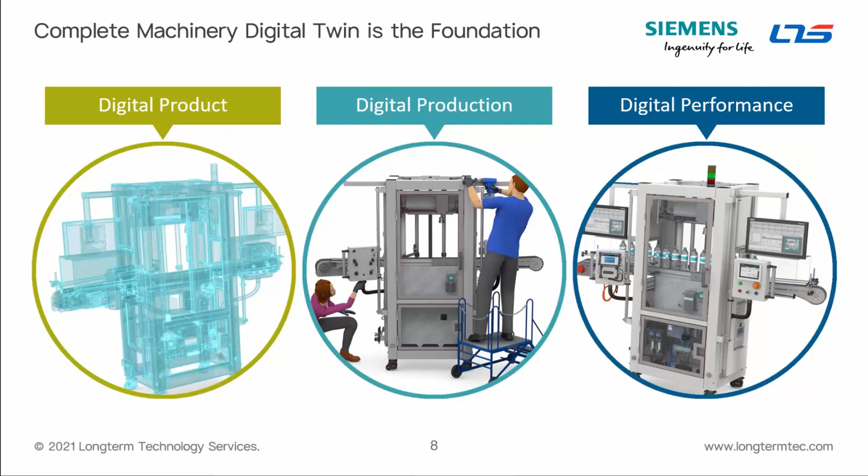With a digital twin, you're really looking at a virtual replica of a product or machine that goes into the realms of electrical engineering, mechatronics, thermal, you name it. It's using physics-based modeling, and it also has the ability to be driven by real PLC code and to validate that code. So this is a really different kind of next-generation simulation that offers you a stand-in for the real-world object, and it can be connected to that object in real time through sensors to measure its performance as well. That has big implications for the way we do things in manufacturing and automation.

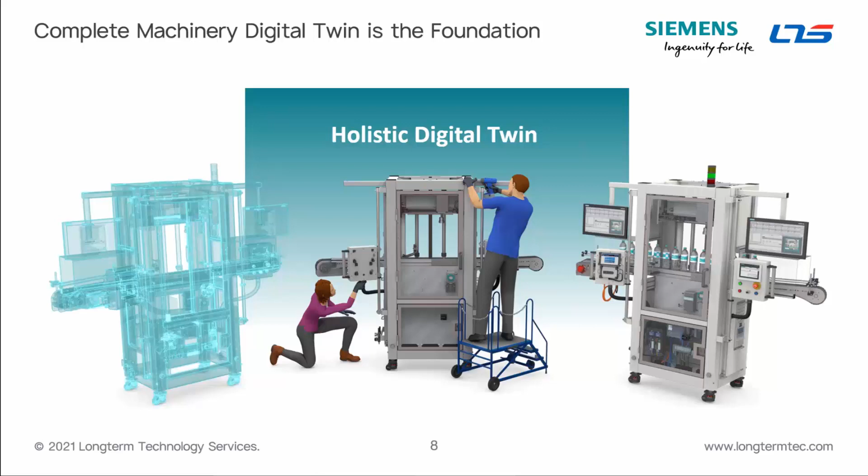It's really this approach that allows you to shift left and bring more of your manufacturing concerns into that design and engineering stage of your product lifecycle. You can do this by performing a lot more work than you could previously in a virtual setting, with the confidence that when it comes time to manufacture or commission a product, you can do that error-free.

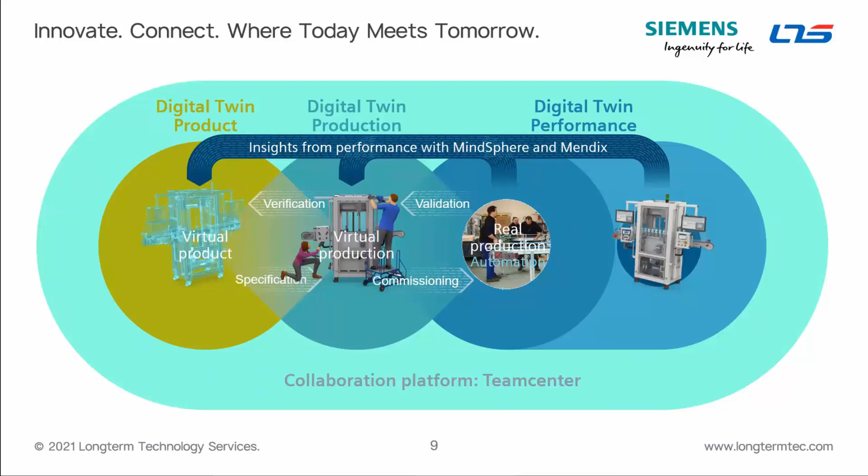So basically, you're no longer stuck creating expensive real-world prototypes only to find out that they don't work. And you're not commissioning real-world production lines only to find out that you're going to get those collisions and interferences that you have to address after the fact, usually at high cost and big loss on your lead time. So that can all now be done in a virtual setting for a lot less cost and much less time, with greater accuracy and efficiency.

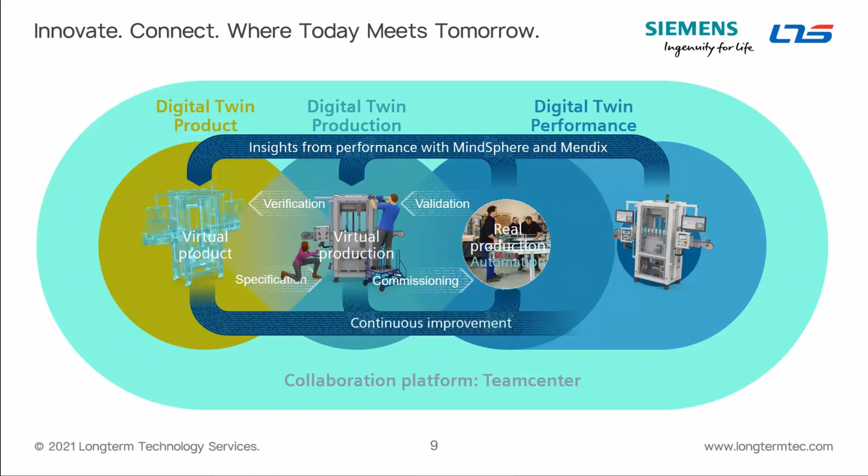So once you've decided to work with a digital twin, it's then really a question of scope. What is the scope of the digital twin product you're looking at? This runs all the way from plant-level simulation down to the level of the individual machine, the PLC that is driving that machine, the hardware that you want to hook up to that virtual commissioning project, that digital twin. But for this webinar, we're going to focus on that top level, which is really the plant simulation level, and all of the associated opportunities with that.

In the other webinars, as part of this 5-part webinar series, we'll focus on some of those other levels. So for example, in tomorrow's webinar, we're going to be moving more toward the robotic station or the line, as we move down that funnel, as you can see.

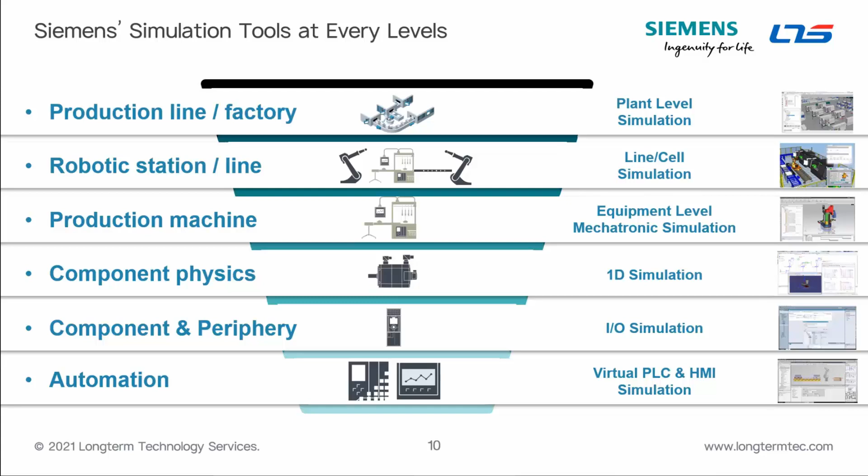So our customers in all industries, from bottle filling to the shipbuilding industry, are using plant optimization solutions. Siemens itself is using plant optimization solutions for turbine building, power transmission, industrial PCs, and healthcare sectors. Some of the key benefits realized by our customers include substantial increase in throughput, reduction in logistic cost, and significant reduction in cycle times.

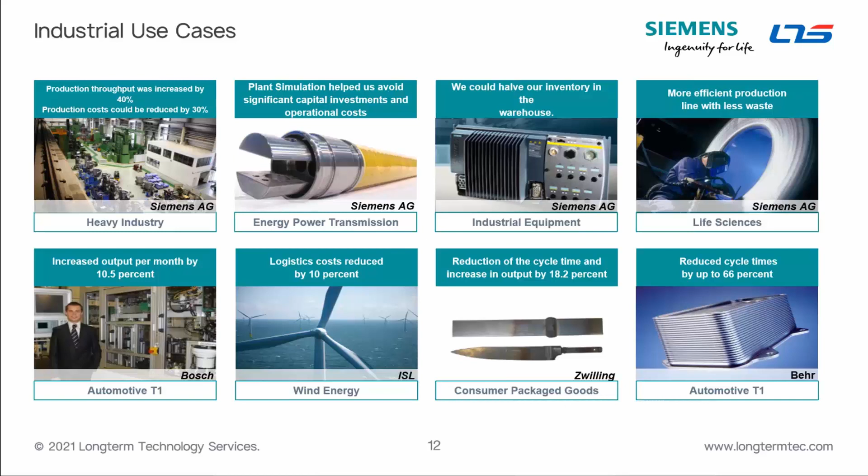Our discrete event simulation is a powerful simulation tool where you can build an accurate digital twin of your manufacturing as well as logistic facility. It could be for a greenfield facility or for an existing system, so-called brownfield facility.

Flexibility: using the digital twin, you can check the flexibility of your production system to meet future needs. An example could be checking the feasibility study for a new product introduction in your line.

Throughput: increase throughput by eliminating bottlenecks and by reducing throughput time.

Next, we might be interested in knowing or right-sizing the resources that we have on the shop floor. For example, it could be a conveyor system, robots, or multiple machines. If you go with a smaller number, you may not be able to achieve the required throughput. On the other hand, if you're over-generous, you'll end up spending excess capital.

You're also interested in reducing the footprint. How can we do that? By optimizing the layout, you can now reduce the footprint.

Work in process: now you might have lots of work in progress between the stations, or raw material stored somewhere. You want to optimize it, minimize it actually, meanwhile not affecting the actual production process.

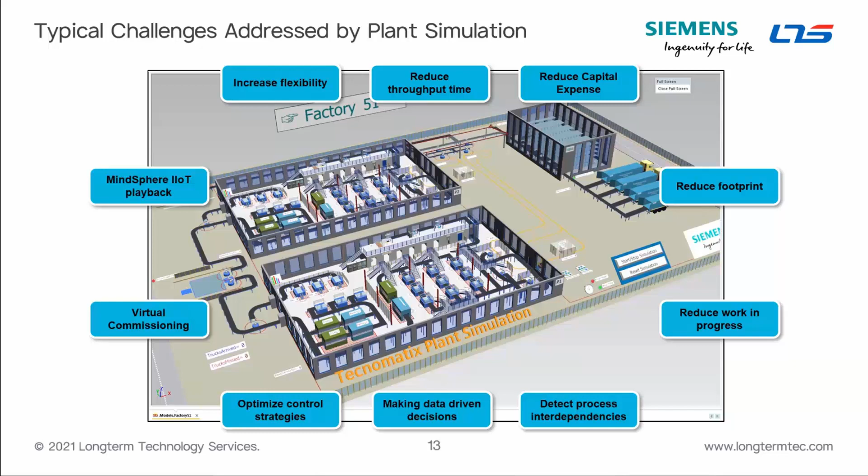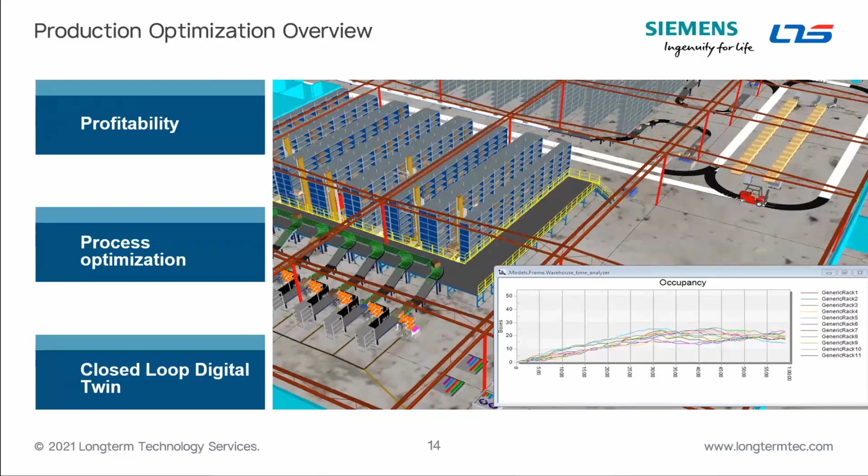So with this, I'll be covering three key aspects of plant optimization solution which can bring significant benefit to users. We will see how you can be profitable by right-sizing resources, by optimizing the process, and by leveraging the power of closed-loop digital twin.

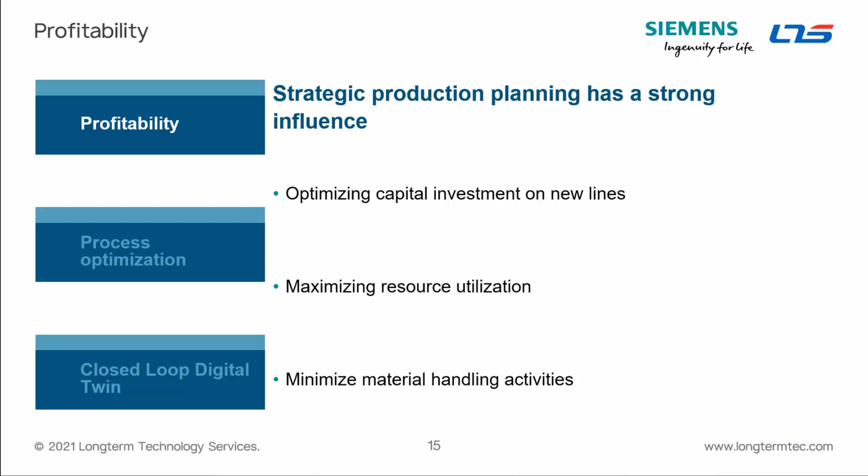Profitability. We want to be profitable. To be profitable, we have to minimize our capital and operating expenditure. It could be for a production line or a logistic facility. Without jeopardizing required output is a key factor here. This can be achieved by effective utilization of existing resources and minimizing non-value added activities.

In this example, you're going to see how you can increase the utilization of existing resources, how you can get higher return on capital employed, and select the best strategy for your production line.

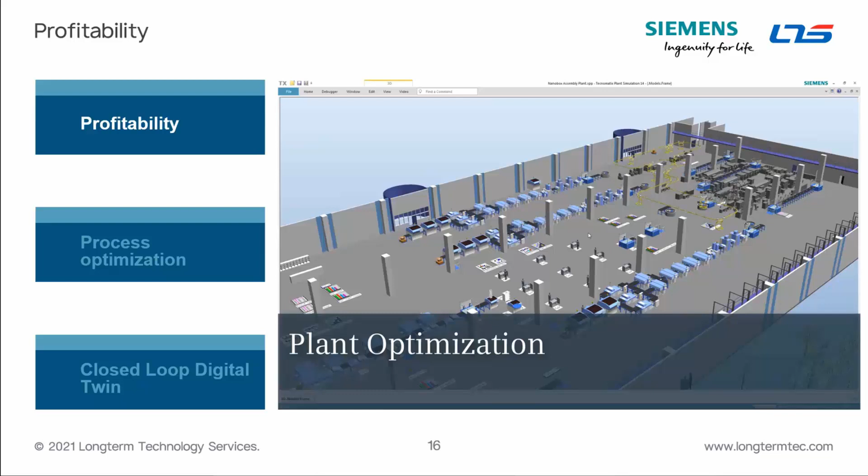Let's begin. This is our production digital twin of the plant, which we keep up to date. This is our kitting area. Kits have become very complex, leading to much rework, and as a result, lowering key performance indicators like utilization and return on capital employed.

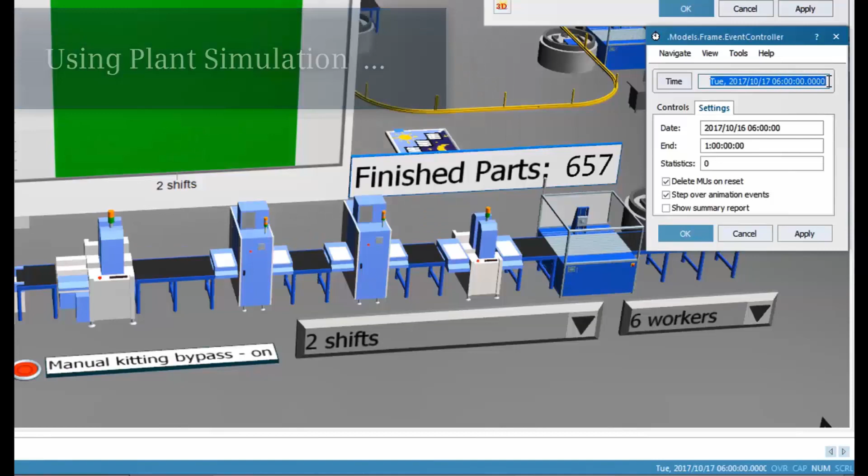We will see three different use cases. First, we will see a use case where we add 2 additional workers to the existing shift, and check the effect on adding 2 more workers. The current baseline utilization is 70% and return on capital employed is 3%.

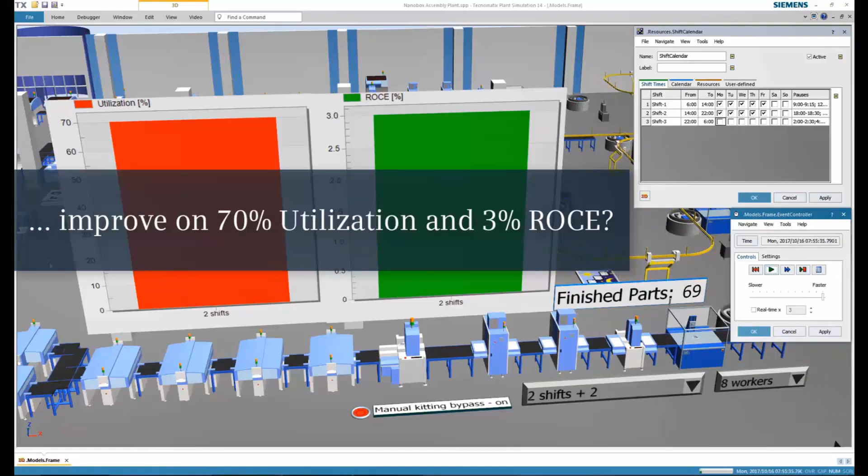Now we can fast forward the simulation to save us some time. This is the advantage of using the solution. We can see the return on capital employed has doubled and utilization has gone up.

Now, how about considering a second strategy? In this strategy, let's take three shifts and check whether our utilization will go up or the return on capital investment has gone up.

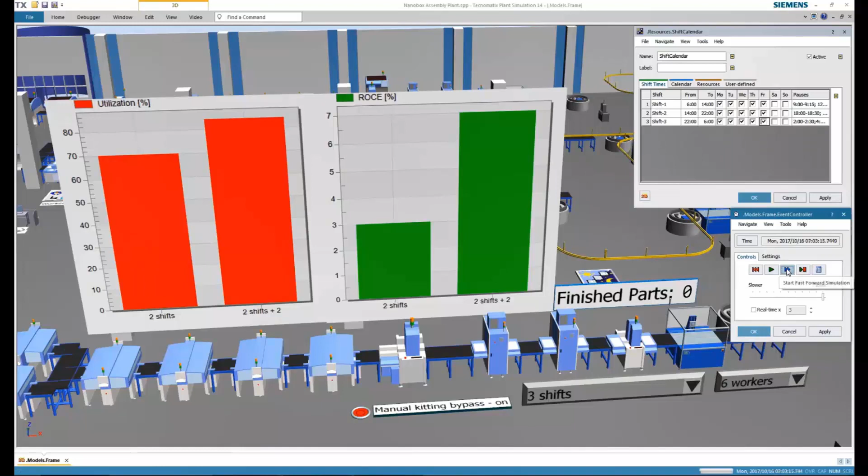Once we run the simulation, we can fast forward. In this case, we are running more parts. However, utilization has not gone up. In fact, it's lower, even the return on capital investment.

At this point, we can completely rethink our strategy. This is the third point: how about bypassing the manual kitting and making it automated kitting?

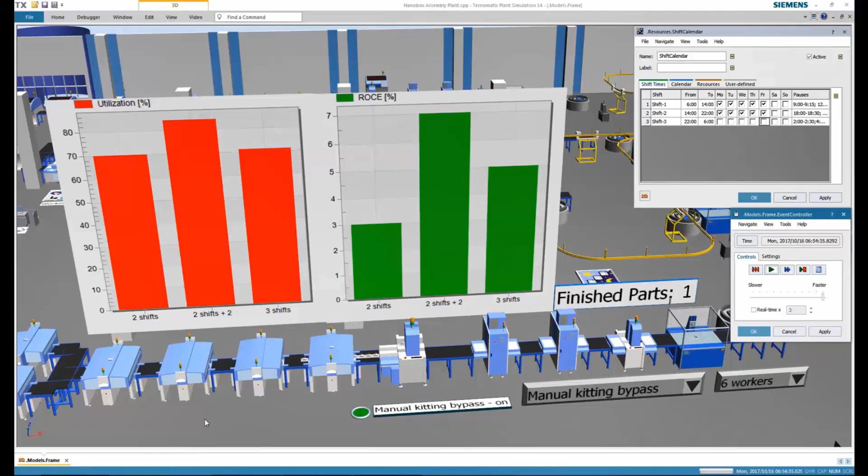The simulation shows there are no parts running through the manual kitting operations. We simulate zero kitting rework, bypassing the manual station. This allows us to assess the potential for automatic kitting.

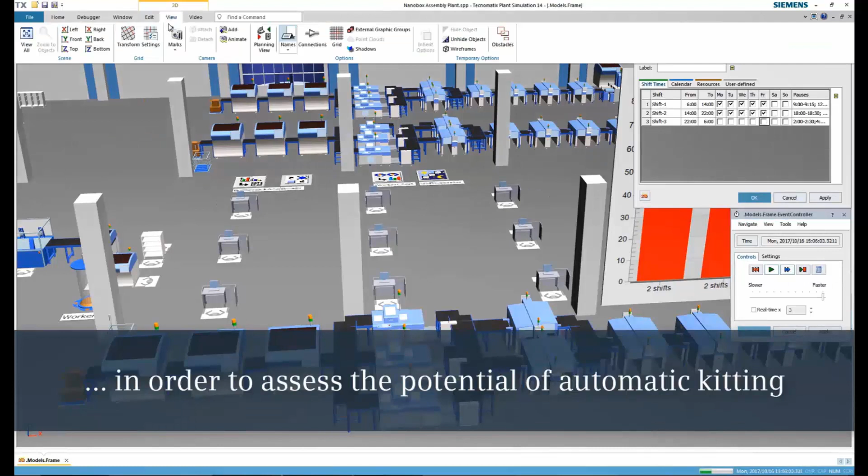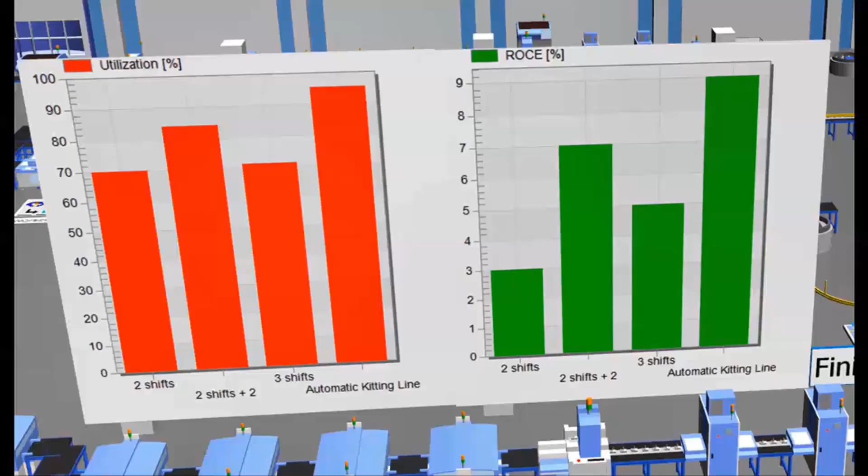After simulation, the digital twin clearly shows the preferred solution, that is automatic kitting, as you can see at the end. The return on capital employed has increased threefold in the automation case and in the 2-shift production process.

By using our solution, you can gain confidence in your investment, lowering operating costs. To summarize how we can be profitable, the simulation tools we are using allow us to evaluate different strategies in the digital twin itself, and we can further fine-tune the selected strategy. This translates to saving considerable financial resources as well as time.

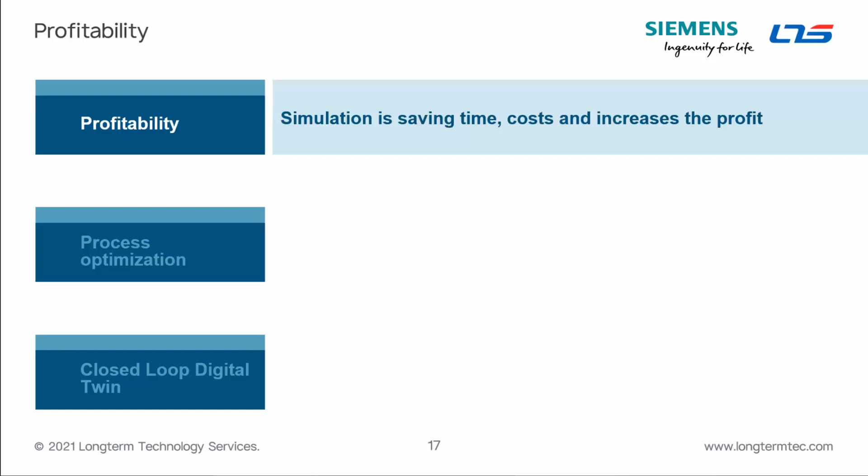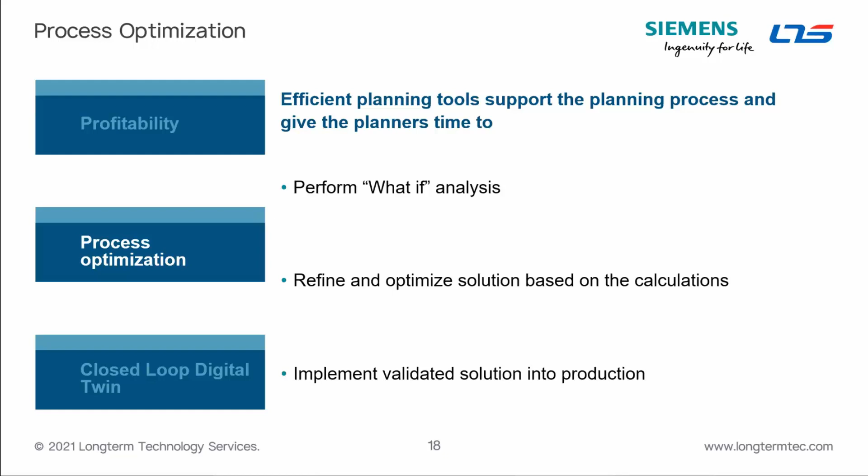Process optimization. Using our solution, you can test different production scenarios, select the best scenario suitable for your production process, and finally implement the optimized solution in your production or logistic facility.

In this example, we are going to see how to detect underutilized resources first, and second, how to optimize a resource that we have selected to get higher throughput. This is our electronic assembly line.

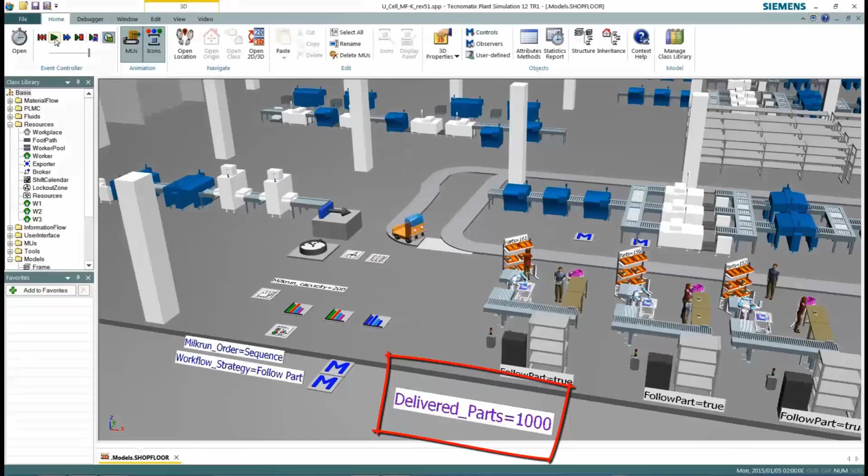Running various scenarios in digital twin allows us to arrive at the strategy that increases the output by 80%. As we can see, from baseline 1000 parts, the throughput has gone to 1794.

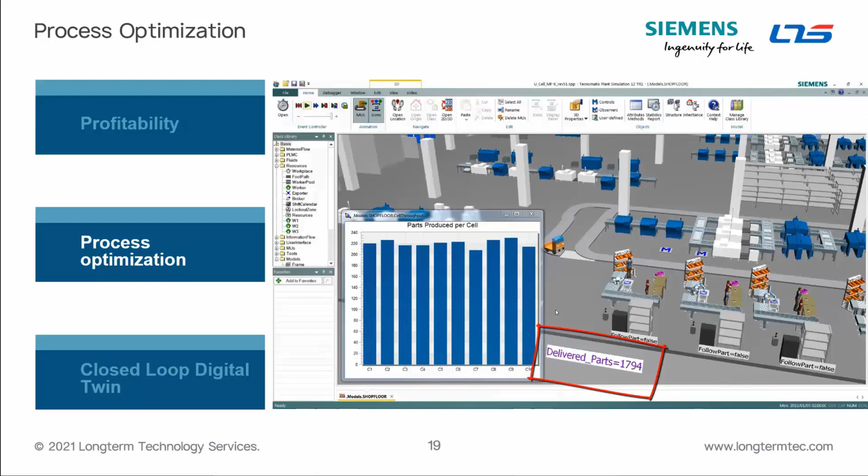This is a usual case where customers have realized lots of benefit out of our solution.

To summarize, by using our solution, you can optimize the production process. This optimized solution results in effective utilization of existing resources and substantial reduction in terms of inventory.

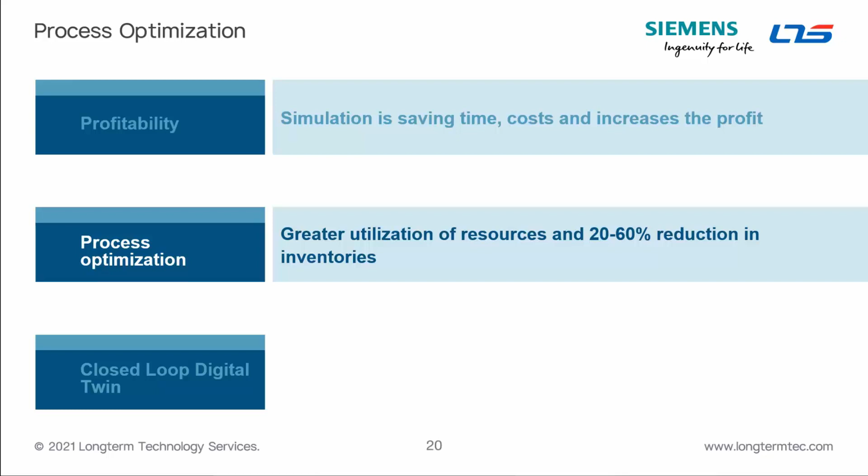Finally, we'll see once your plant is operational and your equipment is up and running, how you can leverage this digital twin simulation. We can take data from the actual shop floor and put that data back into the digital twin to see how production is performing, detect issues or errors, and take corrective measures in the digital twin itself.

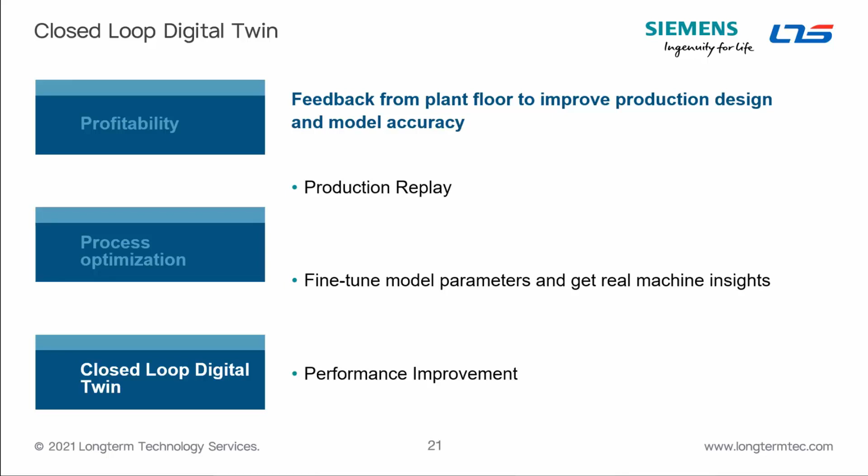Once we have come up with an optimized strategy, that solution or strategy can be implemented in the real production floor.

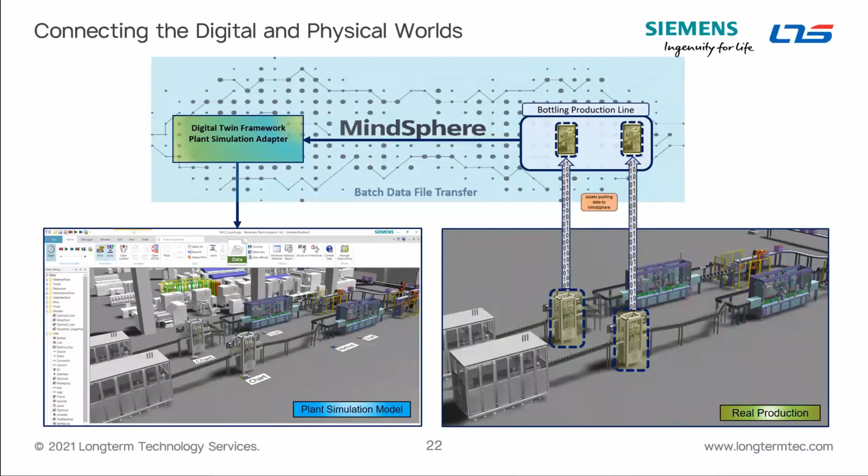In the next example, we are going to see exactly how you can take IoT data from the shop floor and feed it back into a digital twin to detect issues in the actual shop floor and come up with a solution that is best suited. Let me go ahead and play this video.

We launched the closed loop discrete event application from MindSphere, our IoT platform. Yesterday, we saw a drop in production of around 100 cans. We also noticed suspect behavior of a conveyor. We will use conveyor production data, IoT data collected yesterday by MindSphere, to create a study for that conveyor.

Ingesting production data by a digital twin will transform it into a closed loop digital twin. We will want to review what happened, but more importantly, fine-tune the system to compensate for the loss of production until the conveyor is fixed.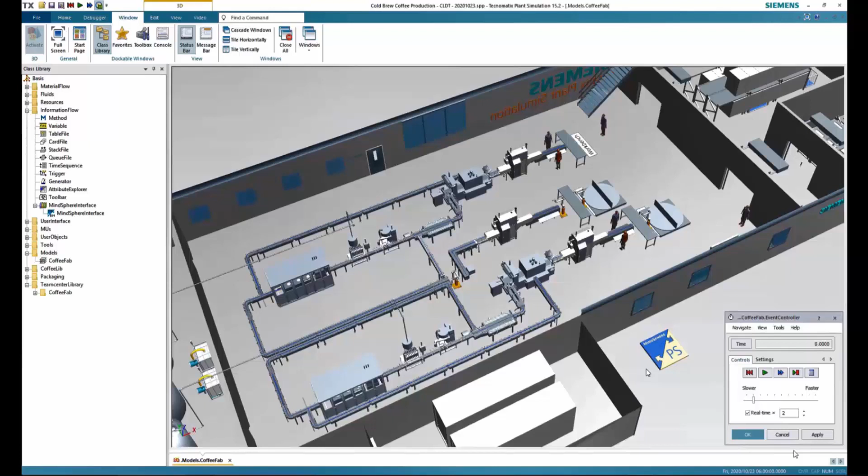The conveyor might have triggered interdependencies beyond the packaging department, so we use the digital twin of our complete production. We add a MindSphere interface to our digital twin, load the study, and apply it to the model. Here is some of the IoT data that is ingested.

Now let's run the study. The closed loop digital twin uses IoT on the conveyor to simulate its behavior. A closer look here confirms our suspicion that the conveyor is failing, and we can clearly see the impact on production. The production rate is going down.

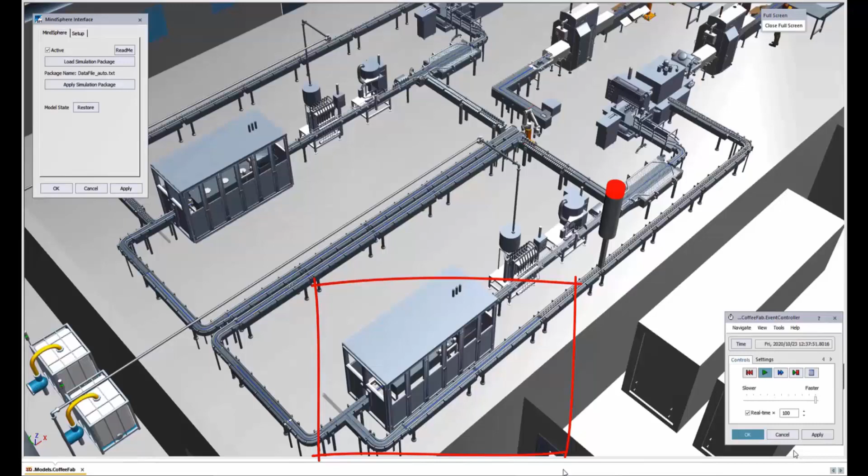The actual production rate is 10,465 cans. We apply an adjustment in this case, as you can see, since the production has gone down.

We'll apply an adjustment, speeding up the minor feed line conveyor to compensate for the loss.

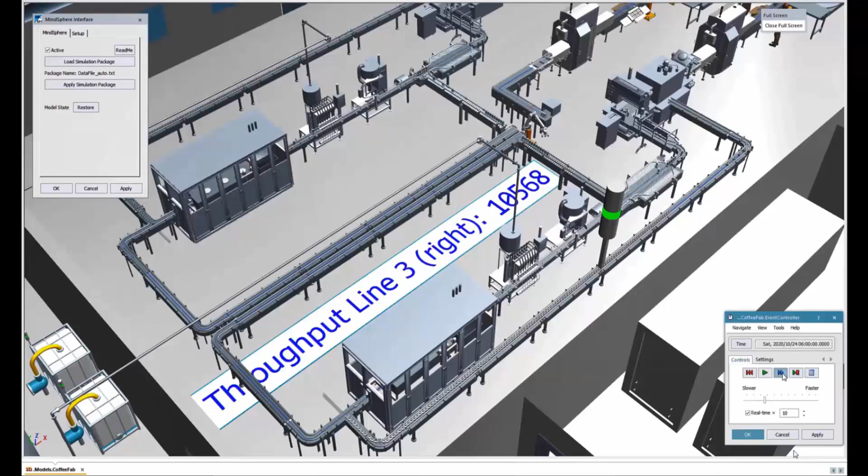This is how we use MindSphere IoT and the closed loop digital twin to fine-tune our production, adapting to daily changes. The closed loop digital twin confirms we can apply our changes to production and compensate for the loss of 100 cans. So the new data coming up is 10,568, that's a 100 can improved throughput.

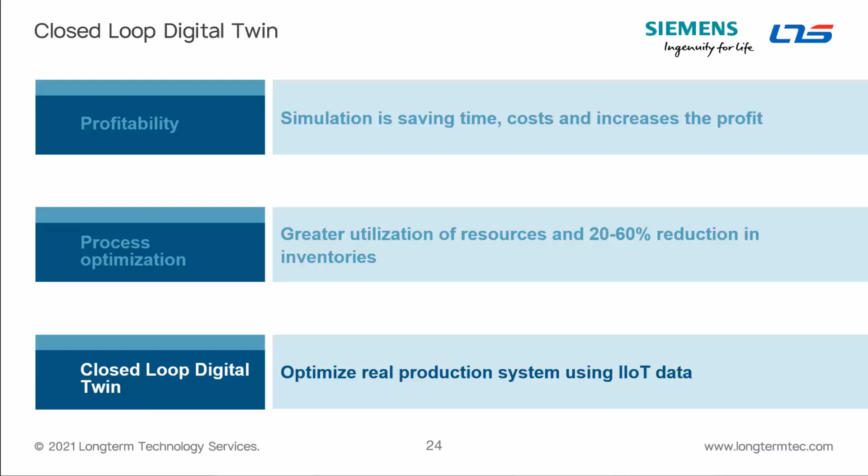To summarize the closed loop digital twin: using a closed loop digital twin, you can bring IoT data from the shop floor into a digital twin to see where the real problems are, validate the solution in the digital twin, and improve your existing production process.

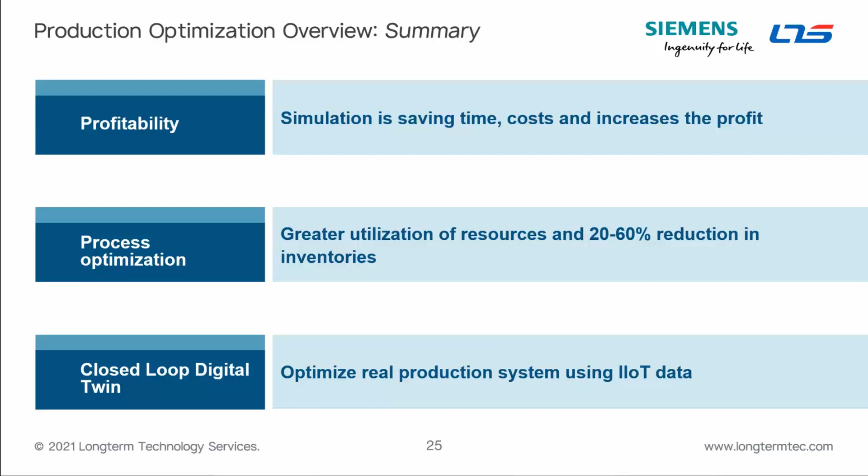What we have seen in all the slides is how you can increase your profit by minimizing capital expenditure as well as operating expenditure, and tweak the production system to get higher throughput. Finally, how you can utilize IoT data in your digital twin to see what's happening in the actual plant, which could be a potential service offering by line and machine builders to OEMs.

We are going to see a real world example of a small and medium scale industry. Mectop falls under the small and medium business category. They are based out of Switzerland, an equipment building company specialized in food and beverage processing solutions. Key challenges faced by Mectop are delivering a complex conveyor system on time, making intelligent complex designs to meet ever-changing customer demand, and finally, verifying the feasibility of the solution, including proof of concept during the sales process.

Using our solution, Mectop was able to build and simulate a digital twin of a complex logistics system to validate three key aspects: plant capacity, optimized control strategy, and planning ahead well in advance. They gained the confidence of the customer by showing what the final system will look like and that it will perform as expected during the proof of concept phase.

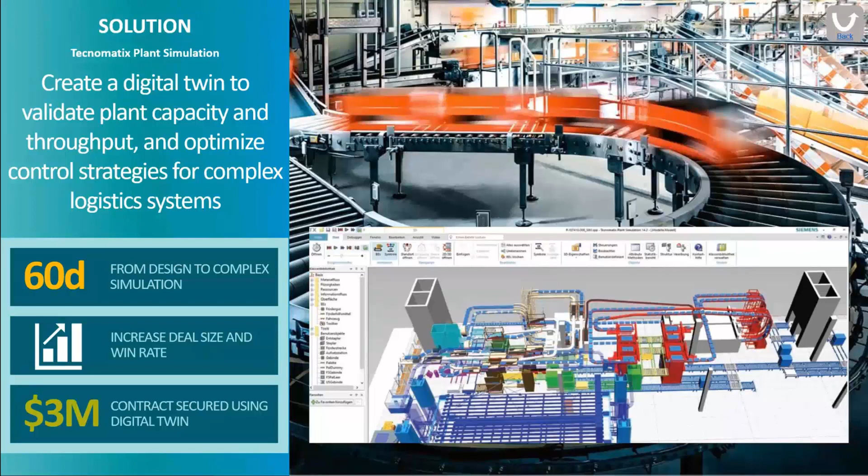All the activities, right from the design till the simulation, they were able to complete in Plant Simulation within 60 days. This cleared the way to secure a customer contract worth approximately $3 million. Key factors to their success was building a digital twin of a complex system using Plant Simulation and delivering the solution on time. With that, I'll turn it over to Philip.